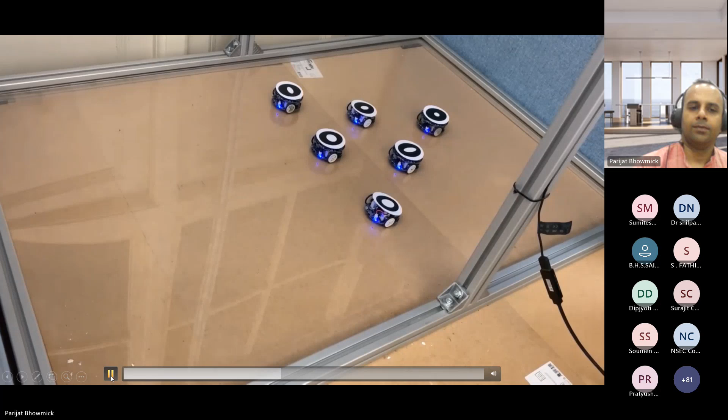Now, you have seen the first part of the video, and from that, what are the different information that we can gather? You could see that here 6 small 2-wheel mobile robots are performing together, right? Now think about how this experiment is relevant to the title of this talk. During our undergrad, when we learned control systems or signals and systems, we used to consider one system at a time, right?

Suppose you are given a system: either you have a transfer function representation G(s), or a state space representation given by x dot equals Ax plus Bu, y equals Cx. Once the system is known and you are asked to design a controller, we know different controller design techniques. For example, P, PI, PID are very common, or even lead or lag compensators, and we used to do that.

Now, the question is, if instead of one system you are given a group of systems, what will happen? And these systems are not operating in an isolated manner. They are working in unison. That is the first question which will take you to the domain of multi-agent systems. So once again, multi-agent means multiple systems are performing on the same platform. That's why the name multi-agent system. Each system is called an agent, so multiple systems are called multiple agents.

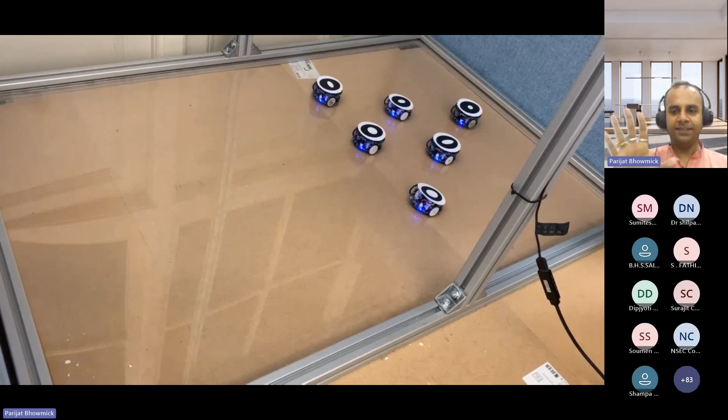Consensus means, if you see the dictionary meaning of the term, an agreement. Now, in the literature of multi-agent systems and control, the term consensus is really important, because whatever the agents are doing, ultimately they should come to an agreement. That is, yes, this is our common goal, this is our objective, everybody must obey this. So in that way we say that it is a consensus based cooperative control.

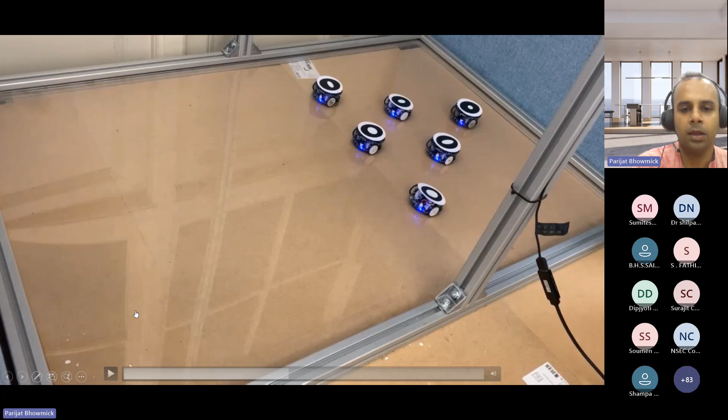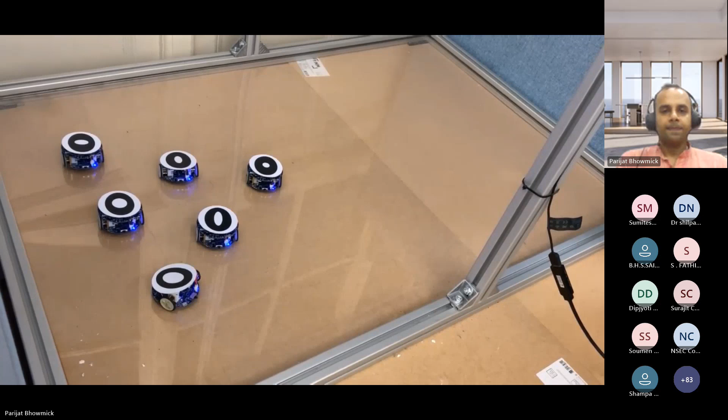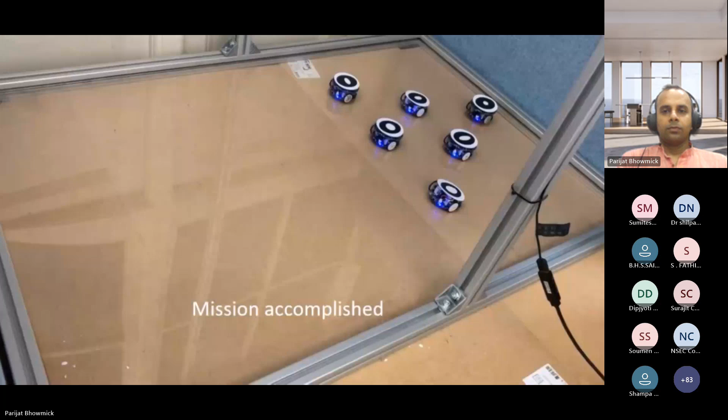Okay, with that I'm starting the video again. Now I believe it would be of further interest to you. There is a second part of the video where you will see that one of the agents will become faulty and the remaining ones will still proceed to finish the mission.

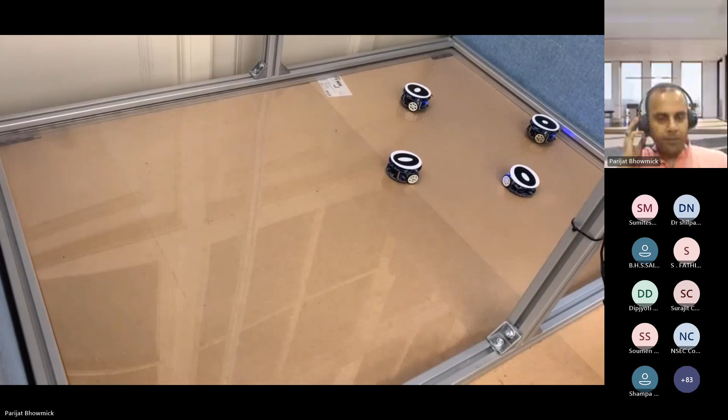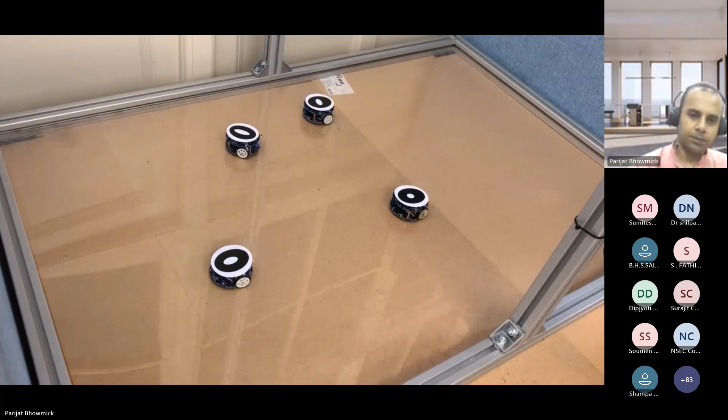I hope that now you have already experienced that fact. This is the second part of the experiment. It started with 4 robots, right? Now, unfortunately, after a certain time, one of them has become faulty, so it is no longer able to operate, right? But this is one of the advantages of the distributed control scheme. Even if one went faulty, the other three will take some time to reconfigure the network, and after some time, the healthy agents will take the mission forward. Okay, so that is one of the main advantages of the distributed cooperative control system.

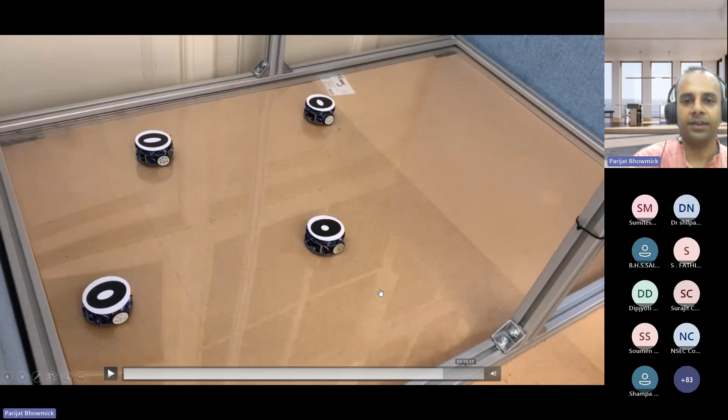I'm going to the next video demonstration. This one was about the two-wheel mobile robot, and the next one is on the UAVs. I hope that will also be interesting for you.

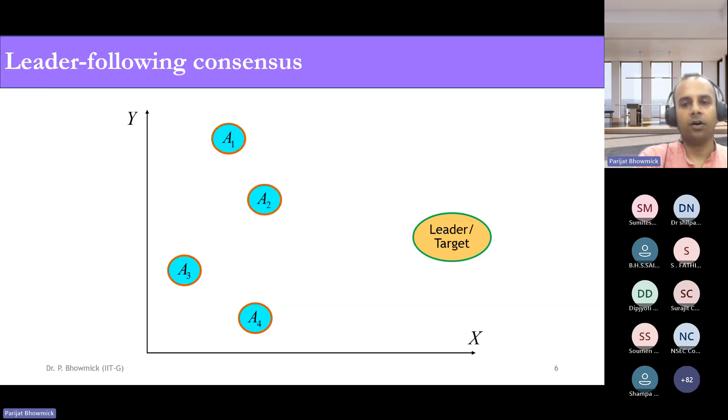Here, for simplicity, I have assumed the bidirectional graph. Now, as I said, if there is a leader or target, then it would be called a leader-following consensus. The same thing, but here some target position is given.

This is nothing but tracking. Suppose you have four transfer functions or four simple systems, and we want all the outputs to reach a common signal, say a unit step signal. If you can design a controller so that all four systems reach the unit step input in finite time, then that is the simpler problem of multiple systems tracking a reference point, which is nothing but leader-following consensus.

Now formation control, I believe it will be very easy for us now because from the experimental demonstrations you have already seen what is meant by a formation. So again, I'm starting with four agents. They are placed in a very haphazard manner, that is their initial orientation.

Here, suppose I have assumed that there is either a leader or a target. If a physical target is not there, then it would be a virtual target. With respect to this, they will try to go there and occupy their position so that there is a particular geometric shape. For four agents, the most popular or convenient geometric shape is the square. So that's why it would be a square formation.

Now, as you've seen in the video, especially for the drones, if the centroid, I mean the leader, moves from one position to another, then as a whole the entire formation assembly will also move. So it will go from one position to the other position without disrupting the shape. This is called formation tracking.

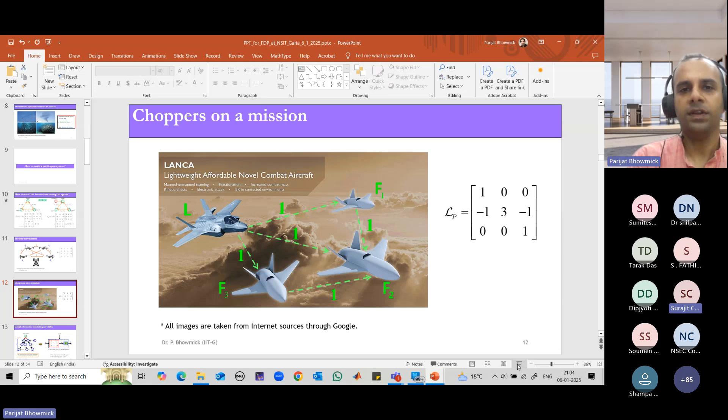So how far have you been able to listen, sir? May I ask one question here? Please, sir, how did you put these values diagonally?

I hope all of you listened to the full explanation for this slide. So I think from here it was a problem, right? From slide 11. Okay, I'm just starting from this.

Now, if we design the network such that all the agents talk to each other in this fashion, where these arrows point out how they are communicating, then its Laplacian matrix would be like this, what I have written.

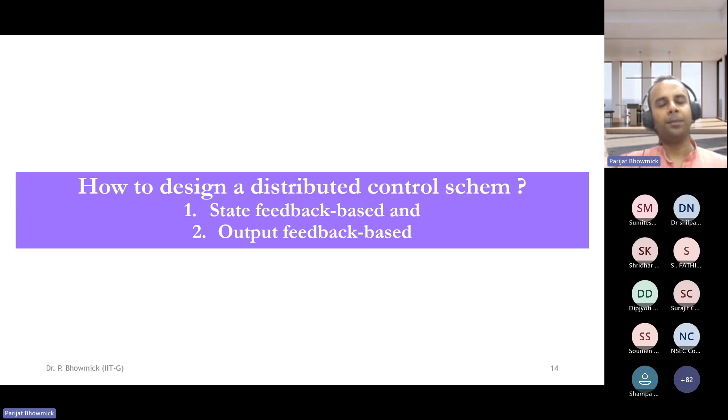With that concept, I'm going to show you that in case of multi-agent systems also, we can design a distributed control scheme based on state feedback as well as based on output feedback. Both of them have some pros and cons. In some applications, state feedback is better; in others, output feedback is better. So let's see the overall architecture.

Okay. The main question is how can we design this control law? Of course, it will depend upon the agent dynamics, which is M, and the graph properties also. Why graph properties? Because the graph is characterized by the L. So if it is an undirected graph or a directed graph, and whenever it has a lesser number of edges or more edges, of course, the L will be different. So the eigenvalues would be different. Accordingly, the whole plant will also change.

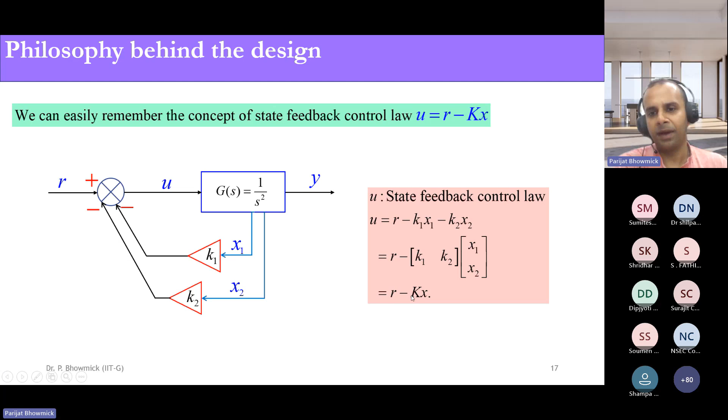So that is the difference between the cooperative control and the single agent, for the single system or multiple system. Once again, you can relate: earlier we had only u equals r minus kx. But now the situation is that it is not only k into r minus x1, but also there is a relative error with respect to the neighboring agents.

Neighborhood error means that when one system is moving, it must also check what is the error with respect to its neighbor. And its controller, which is the local controller, will be acting not on the absolute error, but on the relative error. So that is the pair. In that way, I believe you will find it really useful, and it is not as tough as it seemed at the beginning.

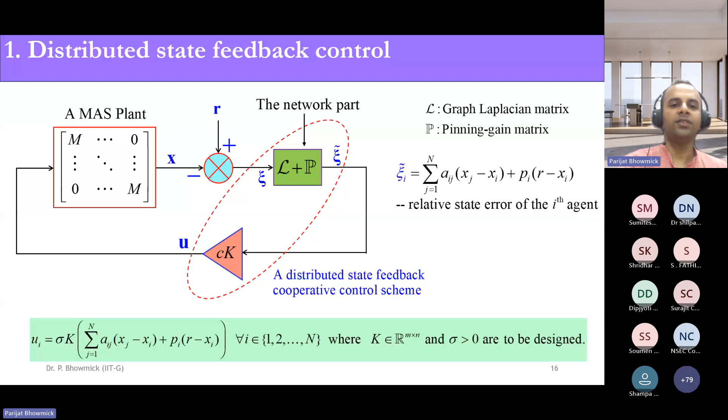The difference between these two schemes: one uses state feedback, the other uses output feedback. And the second difference is that in the first case it was just a static controller, if you remember, there was no dynamics, simply a static controller K. But in the scheme we just saw, we are dealing with a dynamic controller. Gradually we are going to learn how we can design this dynamic controller given a multi-agent plant, because otherwise the entire theory would have no application. Given a multi-agent plant, we have to design this N of s.

Now the same block diagram I drew here is rearranged into this fashion. Why? Because right from the beginning we have been familiarized with the block diagram where everything is present on the forward path. If you remember the classical control scheme with the block diagram from Nagrath Gopal's book or Ogata, there is a reference, then a summer, the error signal goes to the PID controller or the controller in the forward path, after that the plant, and the loop is closed by a unity negative feedback.

So we are familiarized with everything being placed in the forward path. But in this diagram we may have a feeling that in the forward path the plant is there, even the network part is there, but the controller is on the feedback path. But it is certainly not. Why? Because whether it is a forward path or feedback path, you have to check with respect to the input, the summer and the output. So this is the summer, this is the input, this is the starting point. If I start working on this line, this is the first block I encounter. After that, this is the second block.

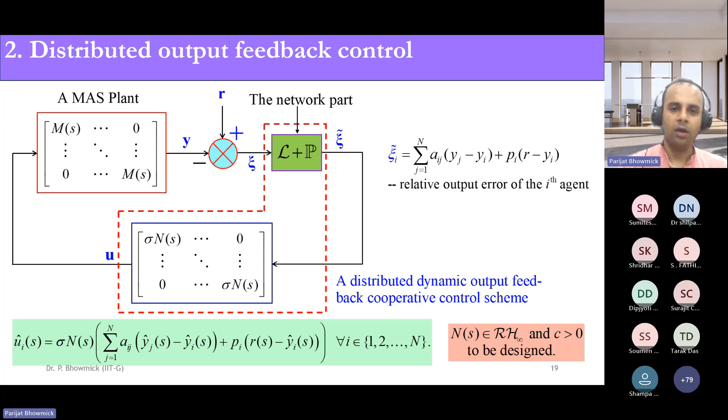So initially when I did it, I also faced the same type of doubt. That is, are we now placing the controller on the feedback path? Is it going to be different from what we have learned in our classical control or even during our undergrad? It is certainly not. So that's why I have redrawn that block diagram.

There is only one trick I have played here. You can see that the controller is coming before the plant, or even the network block is there. So that part I have done over here. The trick is that for the analysis purpose, you can swap these two blocks as well by using the Kronecker algebra. That is not a big deal, okay? But here this is just a rearranged block diagram.

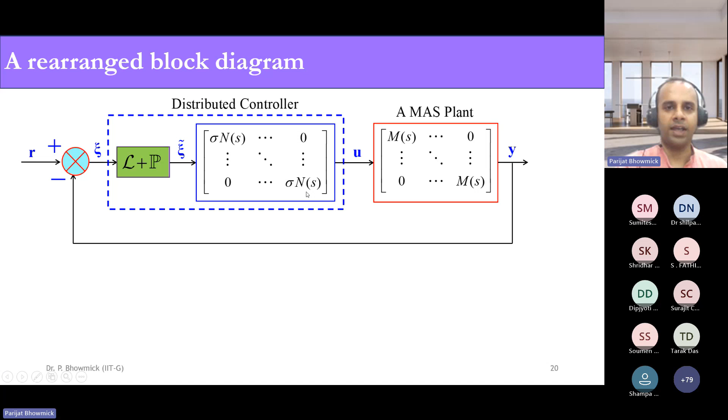Why did I do it? Now you can easily relate. For this reason only I wanted to represent it in this fashion. In our mind, we had that structure: there will always be two blocks, one stands for the plant, another stands for the controller. If one is G(s), another is C(s), the transfer function will be G(s)C(s) divided by 1 plus G(s)C(s). And then we have to find the characteristic equation to check the stability of the closed loop system, and so on, which we learned during our undergrad.

So just to give you that feeling, yes, now we are going to an advanced state, but essentially at every step we can relate with our classical control concept. It is not that learning multi-agent means it is rocket science. It is not at all. The only thing is how you look at it. So that was the main intention of my talk: I wanted to place everything with respect to our undergrad concept.

Here also we have two blocks, although we can see three blocks, but the controller and this L plus P, I mean the network block, together form the distributed controller. So essentially here also we have two blocks, and if you see my marking, this one red block and one dotted blue block. One is the plant, another one is the controller. The same thing which we learned earlier, with the only difference that now either the plant or the controller will contain the network, the L plus P.

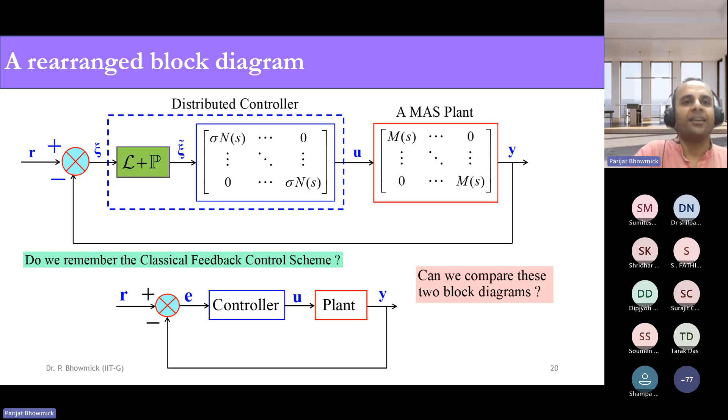After this, we will be stepping into the stability study. For stability study, we have to study the stability with respect to the interconnection of two blocks only. We are not going to consider three blocks. So you can rest assured that whatever we learned during our undergrad, the same type of concepts are applicable here also. After this I'm going to show you that this consensus can be proved simply by showing that the steady state error goes to zero. You don't need to bring in very hi-fi theory to show whether the consensus is achieved or not.

And just for a recap, what are the primary cooperative control objectives? First of all, the closed loop network system must be stable and the tracking error must go to zero. Here xi and e are the same thing; please don't mind the different symbol. But ultimately we have to show that the steady state error goes to zero. That means the steady state output will reach R.

That means, as I have been mentioning right from the beginning, cooperative control or reaching consensus you can always compare with multiple systems or multiple outputs trying to reach one common reference, suppose a unit step input.

Okay, so in that way you can relate. Now we are going to the main part, that is how to design a distributed controller. It is a $1 million question, how to design a distributed controller, because if you think about the class of plants, then there are infinite possible choices, right?

It can be linear, it can be linear time invariant LTI, it can be linear time varying, it can be linear parameter varying, non-linear, and in each category there can be a number of plants or even infinite number of plants. So we cannot expect one very particular or just one common scheme which can be applied to all possible types of plants. It is like impossible.

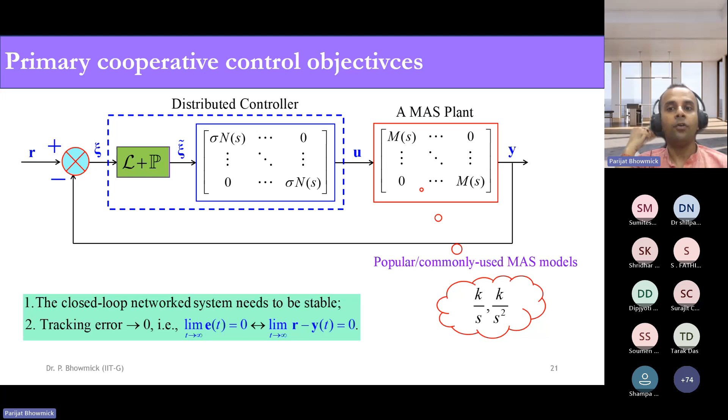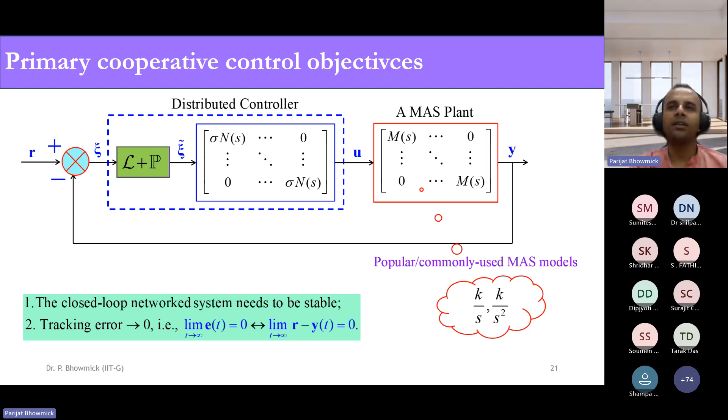If you see the earlier literature, the first 5-6 years, starting from 2003, 4 till 2008, 9, or even 10, most of the pioneering work on cooperative control was devised for multiple integrator systems like single integrator, double integrator, or higher order integrators. Now at this moment you can be very disappointed, or you can ask, oh, this is very simple, first order, second order integrator, or even higher order integrators. What is the point of that, why did the forefathers of cooperative control do it only for these multiple integrator systems?

The reason is this 1 by s square, the double integrator. It seems very small, like it isn't worth much, but it is the most essential or most interesting physical system. Why? Because whatever type of linear motion or rotary motion you think about, most of the things will be governed by Newtonian mechanics, right? By Newton's law of motion, which in formula form is force equals mass into acceleration, that is f equals m into a.

Now take out the transfer function: f equals the mass constant into acceleration, meaning the double derivative of position. After taking the Laplace transform, F of s equals m into s square, s being the Laplace variable, into the position, suppose Y of s. Then what will be the transfer function from force to position? Y of s by F of s equals 1 by m s square.

So that was the main driving factor: whatever motion you model, if the transient part or the disturbance portion is left out, then at steady state motion, whether it's linear or rotary, either force equals mass into acceleration, or torque equals J into theta double dot or J into omega dot; both these equations will give us a double integrator mapping.

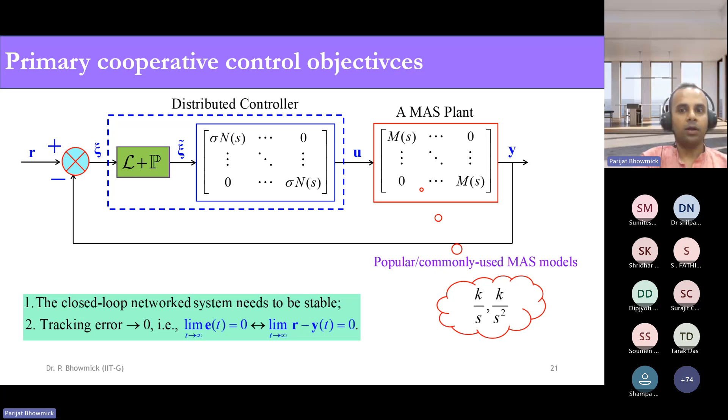So if their approximated dynamics is governed by a double integrator system, then how can we develop a cooperative control scheme so that multiple double integrator systems can reach a particular point? That was the original motivation. Okay, so if you study the literature, you will see that those few papers were mainly developed for 1/s, 1/s², all those things.

Okay, so since I'm going late, I'm just going to end quickly. As I said, for these kinds of systems we cannot expect one universal cooperative control scheme for all possible types of systems. It is not at all possible.

But rather, if we have different classes of systems, for example, finite gain systems, which are the class of asymptotically stable linear systems, passive or positive real systems, or negative imaginary systems, then for these subsets we can design a particular cooperative control law which gives really very good results. So with that, we are going to dive into this.

And here, one more thing I wanted to show you, the last bit. You can ask about the presentation flow. I mentioned that I would be dealing mostly with negative imaginary systems. But what's wrong with the others? Can't we apply the others? Yes, we can apply the others.

But if we have to deal with integrator systems, especially 1/s, 1/s², or multiple integrators, then finite gain systems, as I just mentioned, are the class of asymptotically stable systems. 1/s or 1/s² are not asymptotically stable. So the first theory cannot deal with integrator systems. The second one, passivity-based theory.

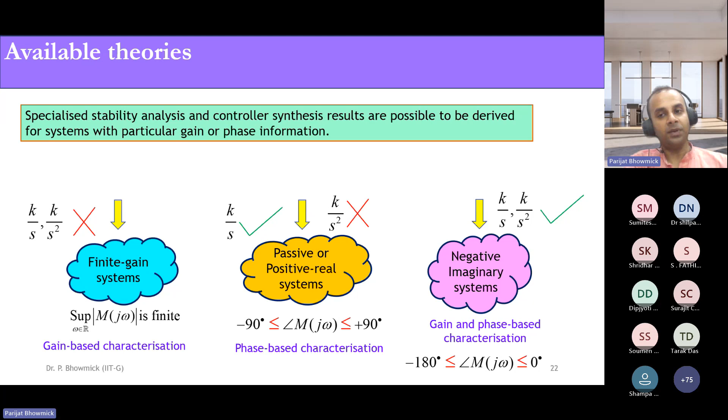Here also, if you think about triple integrator systems or even further, 1/s to the power n, we cannot directly apply it, but at least for single integrator, double integrator, and many other types of vibrational control systems, we can apply negative imaginary theory. So that's why my next plan is to deal with negative imaginary system theory.

Of course, today I don't have the time. So next day I will start with negative imaginary system theory. I will introduce its definition, its properties, its stability results, and then you would be really interested to see how the concepts of classical control theory can be applied to the multi-agent setting, and applied to control UGVs and UAVs with the application of security surveillance.

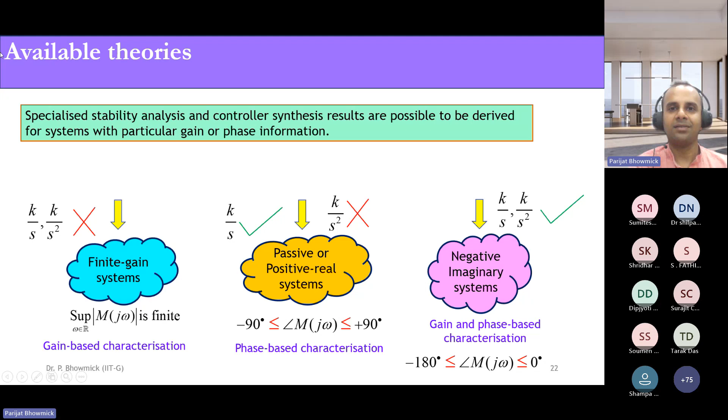Sir, is it possible to share one or two research papers of yours related to this class? So it will be easier for us. Or if you can tell me the name of the paper.

May I show that? If you just go to my Google Scholar, that's momentarily - just let me open that page and then from that you can easily get the information. May I open? I think organizer can.

So this is it - if you go to Google Scholar and type Parijat Bhowmick, then you will be able to see the papers, and that is the negative imaginary system, that is the main research area. So there you will find some papers.

But if you just wish to know the basics of the theory, then you can always see the first few papers published by Professor Lanzon and Ian Petersen in 2008. Anyway, they are very renowned papers, published in IEEE Transaction on Automatic Control. You can see those papers, and always please feel free to keep in touch with me.